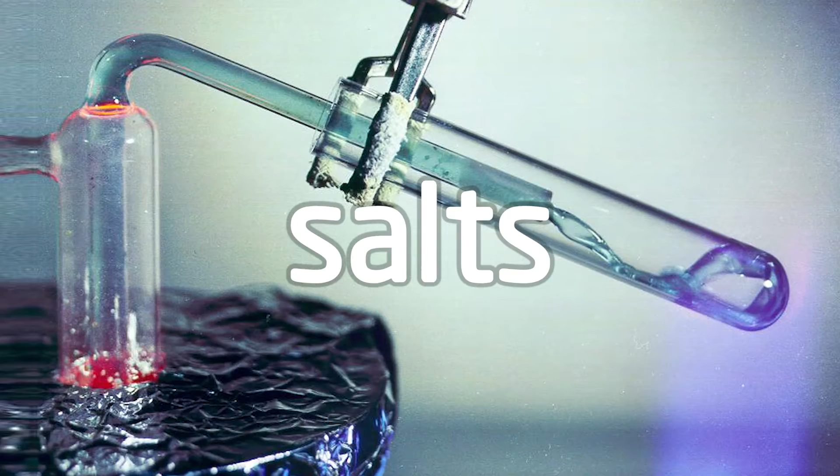You know, the Navy had reactors, and so the Air Force had to have reactors. Very, very radical nuclear reactors, totally different than the kind of stuff we have now, based on the idea that you could take salts and that they would be a really good medium in which to have a nuclear reaction.

Well, we were young chemical engineers at the time. God smiles on young chemical engineers. They do things that in later years would be regarded as crazy. It wasn't that I'd suddenly become converted to a belief in nuclear airplanes. That the purpose was unattainable, if not foolish, was not so important. A high-temperature reactor could be useful for other purposes, even if it never propelled an airplane.

This is an old facility. Look down before you walk. That's our biggest hazard here right now.

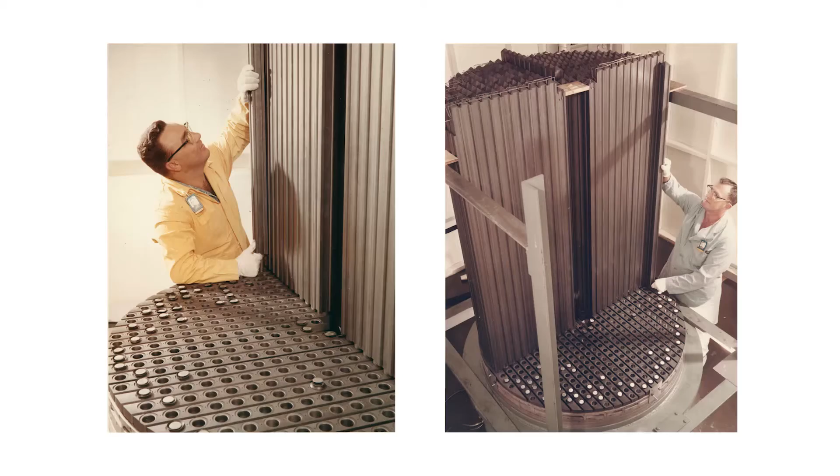Oh my goodness. Yes, yes. I've modeled this shape neutronically. It is like a lead pencil, isn't it? Yeah, it is. Basically. Graphite.

We just returned from a trip to Oak Ridge National Laboratories, and one of the exciting things that the Baroness and I got to do was to tour the molten salt reactor experiment, which was one of these types of reactors that was built in the 1960s. It was an experiment that demonstrated many of the key technologies, although there are some that still remain to be demonstrated.

How long have you been here? I've been here since 1992. There are very few people in mid-career in nuclear energy right now because there's a huge trough. We have a large number of students coming back into it. Well, the context has changed completely, hasn't it? It has. Yeah, when we went into nuclear energy, they said, 'What are you, nuts? There's no future in that.' And it really didn't matter. We say it's the true believers.

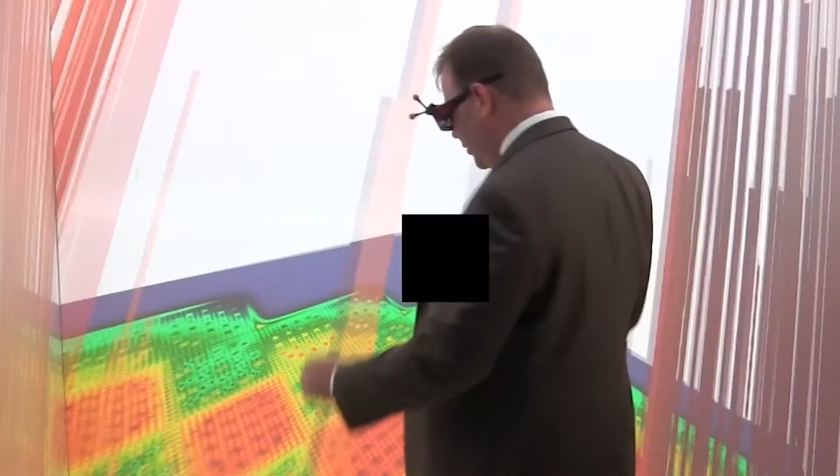So you could have a molten salt reactor that you could walk around on. Oh, this is so cool. You guys have got to try this. Oh, goodness, that makes you feel really weird. There's something in front of me here, it feels like.

I was in 7th grade. I read an Isaac Asimov story about the implications of what free energy would do. And I sort of knew I wanted something, I was going to be an engineer or scientist just from day one. And this sort of said, okay, what can you do to make a difference? And that was where I sort of said advanced nuclear power was something that could make a difference, and that low cost clean energy could make a huge difference to society. If I'm going to have to get up every day for 50 or 60 years working on something, well, it ought to be something I believe in.

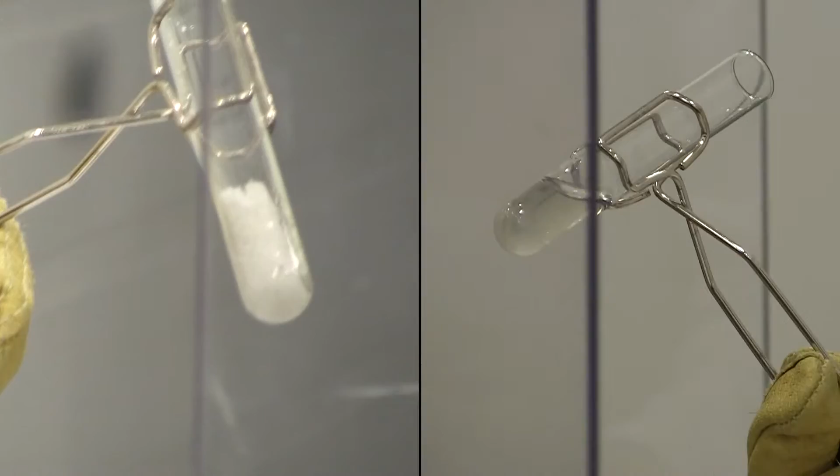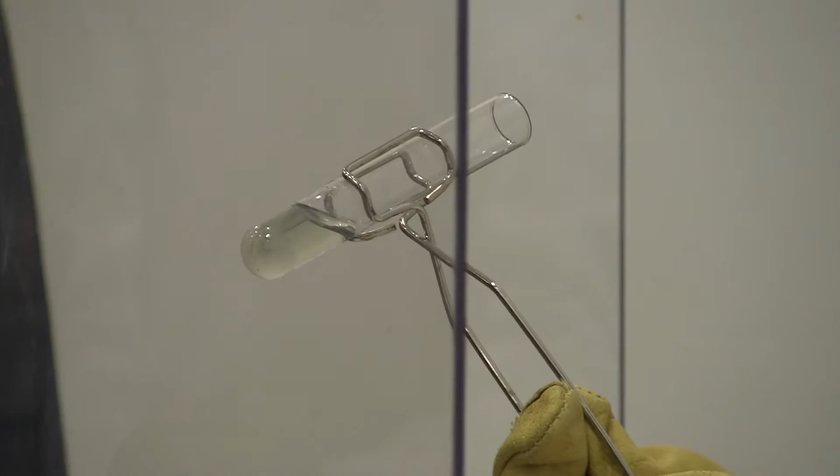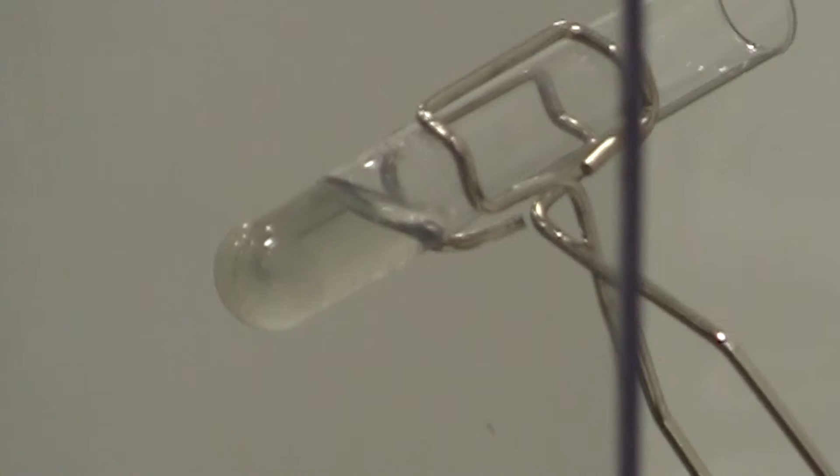Liquid salts are an outstanding heat transfer media, and it really doesn't matter what you're going to be transferring heat for, whether this be a solar power tower, whether this be a salt-cooled reactor or a molten salt reactor. Viscosity on it is 30 times larger, but water is very low viscosity, so it's still a very low viscosity fluid. Some people might imagine this is quite a gloopy or kind of slow-moving liquid, but it's actually quite fluid. You're right. It does go through a melt much like a glass as opposed to water, which doesn't quite do that. So we want to run it 100 C or so above this, so it does flow nicely.

If you go ahead and you repeat doing things in here, you can see you start to etch the glass just a little bit. So what we have to do in a reactor is keep things very highly reducing. If you put extra beryllium in there, essentially giving you a preferred spot to rust. And so this is all about controlling the potential corrosion of the salts within any vessel that you put it in.

Yep, the iron in some of the alloys is more soluble at higher temperatures, and so in your heat exchanger where it's at hot temperatures, you will get metals taken into solution, and then it gets to the colder end, it'll redeposit, and so you can self-plug your heat exchangers, which you would very much like not to do. And your technique to avoid that is keep everything very well reduced so it doesn't corrode in the first place. You'll make it lousy, but there are no strong chemical reactions that are going to take place between the salt and even direct contact with water.

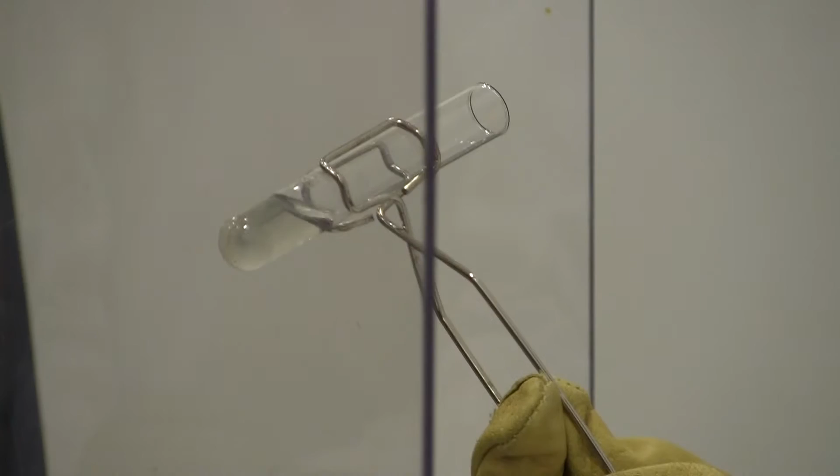The hazards on this are the same as hazards on a deep fat fryer, which is if I trip, throwing hot oil, or hot salt in this case, on visitors would be considered a bad thing. But there's nothing else to this, it just makes a nice little clear liquid.

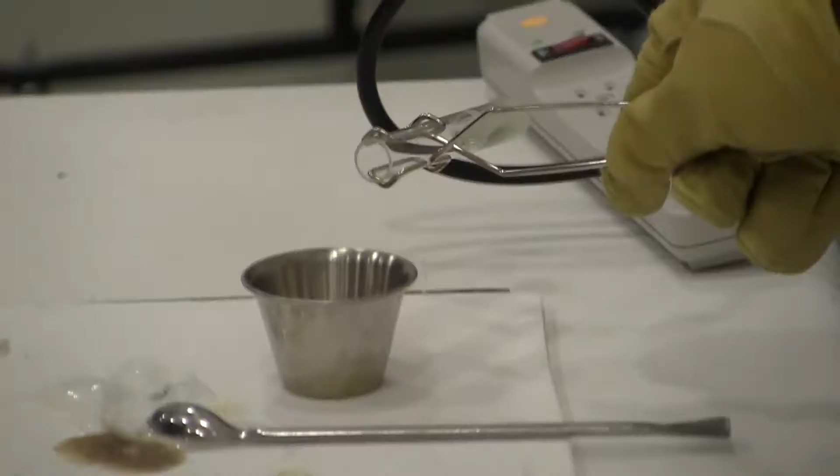I'll just pour this out into a little stainless steel crucible, and you could hear that little snap there, that was a little bit of moisture at the bottom of the stainless steel. At 450 degrees, this thing is a solid, so it doesn't take very long for it to form the solid again. Isn't that a nice feature? If you had a little crack on this and it was starting to weep, it forms a plug. Self-plugging. That's a nice thing, not being under pressure.

On the other hand, if your design keeps the vessel hot, it'll stay liquid, but that's why you have a guard vessel. If absolute worst case happens and you have a massive vessel rupture, you still catch it.

The Navy program that led to the light water reactors we have now was well optimized to the needs of the Navy. It actually wasn't very well optimized to the needs of power production. The reason we have that as the base for our power reactor technology today is because the Navy was prepared to pay the first mover costs to make one work. And once you've done that, it's extraordinarily difficult to compete with it, because those first mover costs are very, very high and have no financial return associated with them.

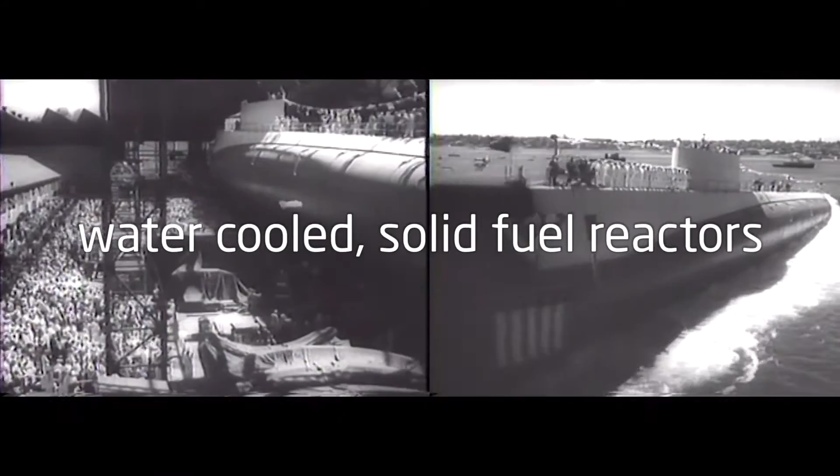The Navy built their nuclear submarines, and the Army took the same technology, the water-cooled reactor, and did their thing. But the Air Force wanted to build a nuclear-powered bomber. Weinberg was a practical man, and he said a nuclear-powered bomber is probably a really, really dumb idea. The dirty little secret was that most of the people involved in it knew from the get-go that it really wasn't practical.

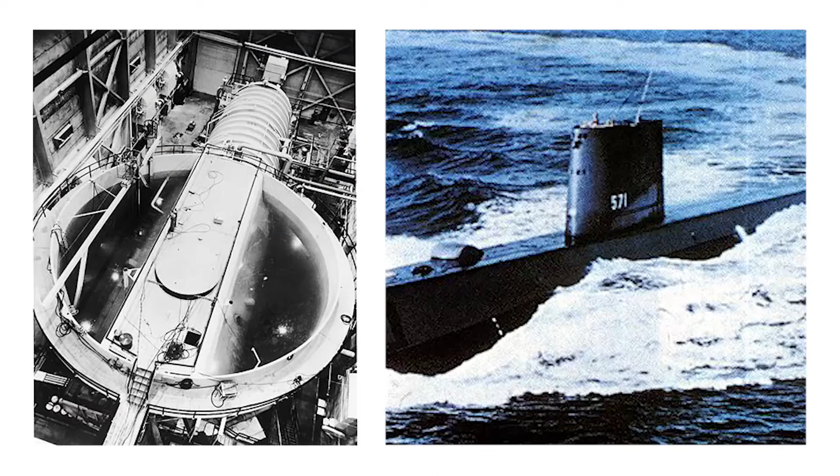In contrast to a submarine, where you've got limited space but you can shield it for the people on board, it's much harder on an airplane because of the weight. Most of us did not really think that the aircraft reactor really could work, but we did feel there was a very interesting technology there that someday could be applied. I would maintain that Weinberg was absolutely right in his assessment of the situation back then.

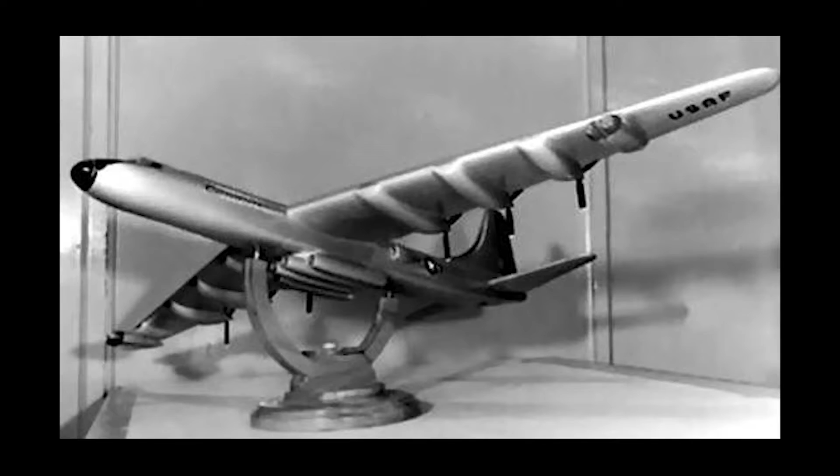He knew that to make the nuclear airplane work, they couldn't use water-cooled reactors, they couldn't use high-pressure reactors, they couldn't use complicated solid-fuel reactors. They had to have something that was so slick, so safe, so simple, that operated at low pressure and high temperatures, that had all the features you wanted in it. They didn't even know what it was.

I think someday this will be looked at as one of the great pivot points of history, that if this nuclear airplane program had not been established, the molten salt reactor would have never been invented, because it is simply too radical, too different, too completely out of the ballpark of everything else to be arrived at through an evolutionary development. It had to be forced into existence by requirements that were so difficult to achieve, and the nuclear airplane was that.

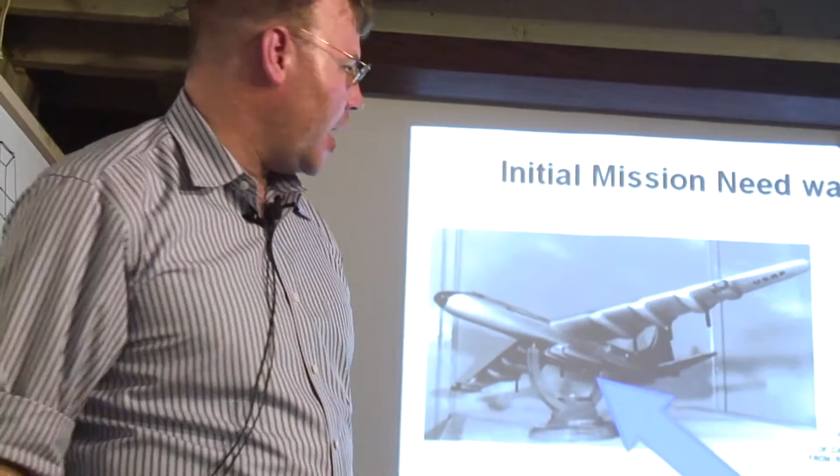So they began working on this high temperature reactor. Remember, this was invented before we had ICBMs or anything like this. This was a doomsday weapon. If you're flying this thing to Russia, it's the end of the world.

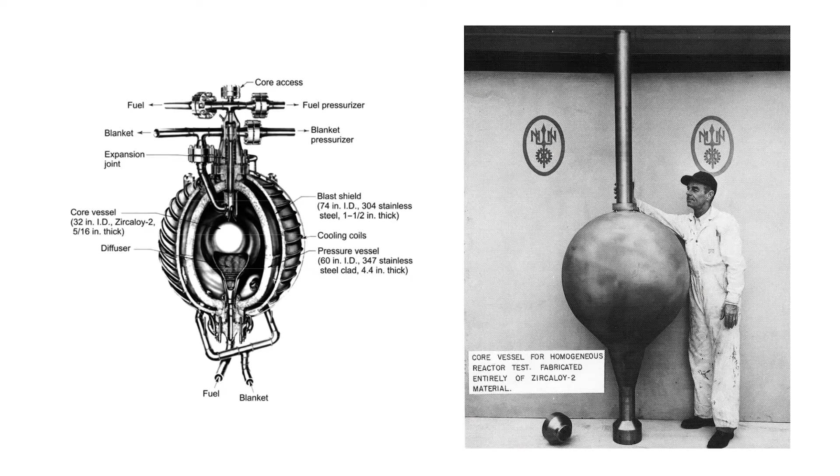I suppose you'd have to say it was a miracle that the homogeneous reactors operated at all, rather than that they operated well. Chemical stability of the system was not really sufficient, it was chemically unstable. The second reactor actually operated very well. That was the molten salt reactor experiment.

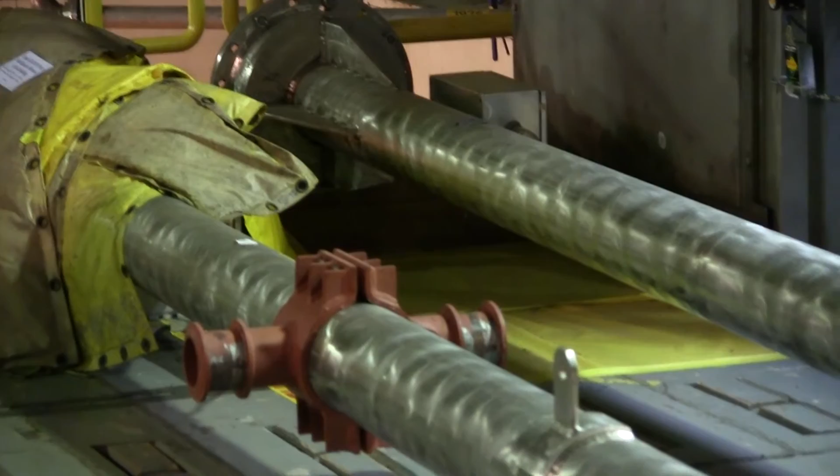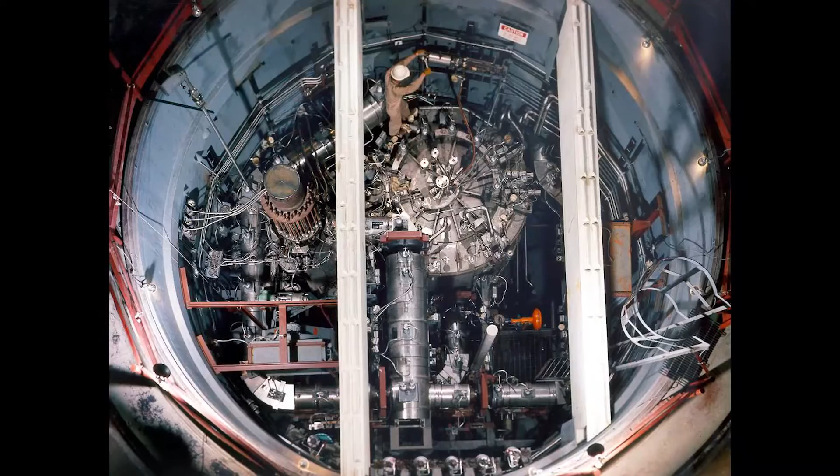So all those long-handled tools they had for operations, it was almost heroic actions when they were trying to do things. You've got this length of distance, and we'd certainly try to design things today that could be robotically handled. It just would not be designed the same way as it was at that point.

One of the things I've learned from talking to some of the old timers at Oak Ridge - these guys are in their 80s now, if they're even alive - people didn't disbelieve that we could build the machine. They didn't believe that we could maintain it.

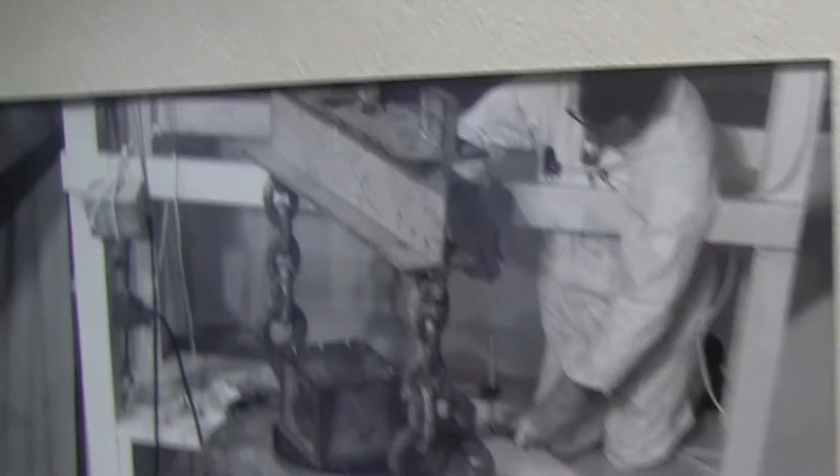Operation of the MSRE was not too difficult, and the people that I had working for me, they all had hound dogs under the porch, old cars out in the yard that didn't run very well. If anything came up with the molten salt reactor, they said, "We'll fix that." "How you gonna do it?" "I don't know, but we'll fix it."

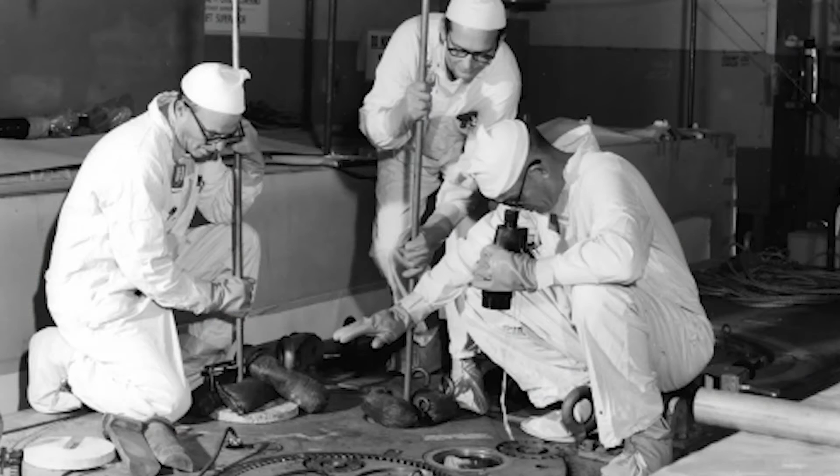And they did. One time, the sample capsule is down in the pump. The flexible steel cable got tangled up. We got bad news - here's the end of that cable cut off. So I said, what are we going to do? And there's the good old boys for you - they said, isn't there such a thing as fiber optics? There's the capsule. And they fished that capsule out. We were back in business.

And they had a lot of long-handled tools, remote cameras. It was challenging, but he felt like, despite the challenge of operating high radiation fields, that they were able to operate and maintain that machine over the course of its lifetime.

We worked for several years on an experiment that proved that you can handle this molten salt reliably, and when things go wrong, we were able to fix it. The advantages outweigh the difficulties, and the concept is ultimately going to be a practical application.

We still have a few folks, even operators, who are around here. Syd Ball's office is just literally three over from me. He was at the controls when it reached its highest power. He told me that was an accident.

It sure was. Yeah, there's another way to tell that story too. I was running some tests late at night. The device that I was using got stuck in the wrong place and pulled the rod out, and the power went up and up beyond the design power, and then it controlled itself and went back down.

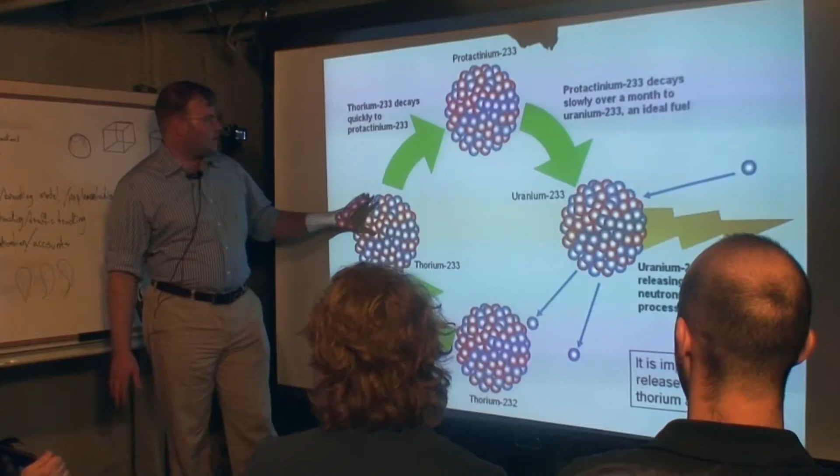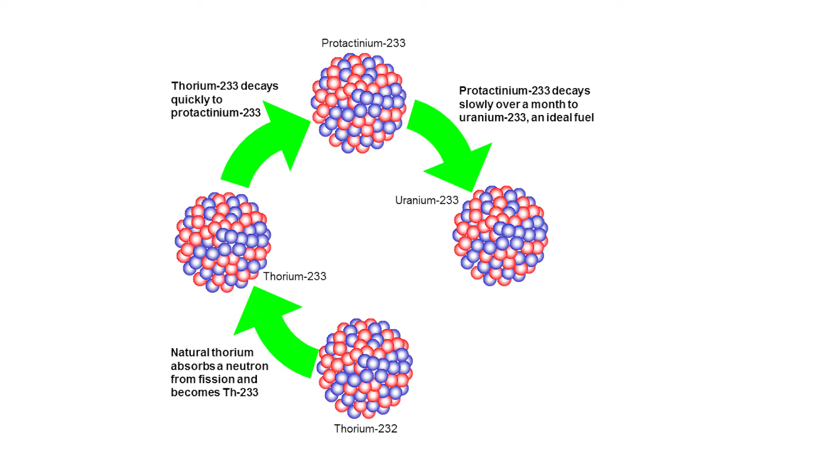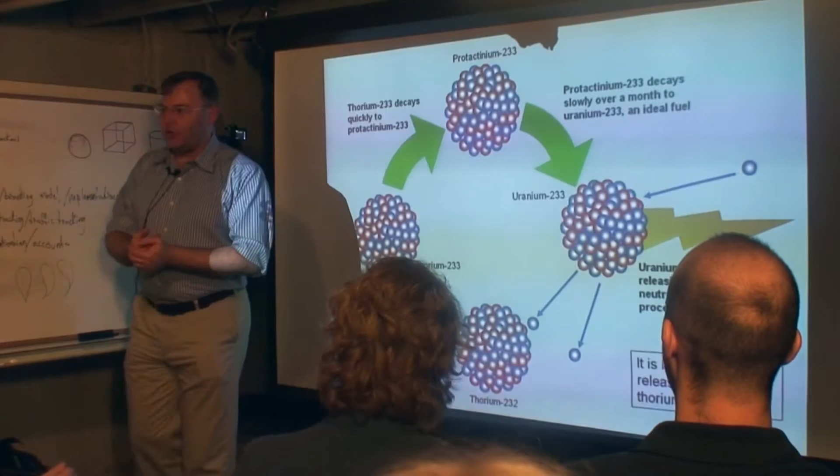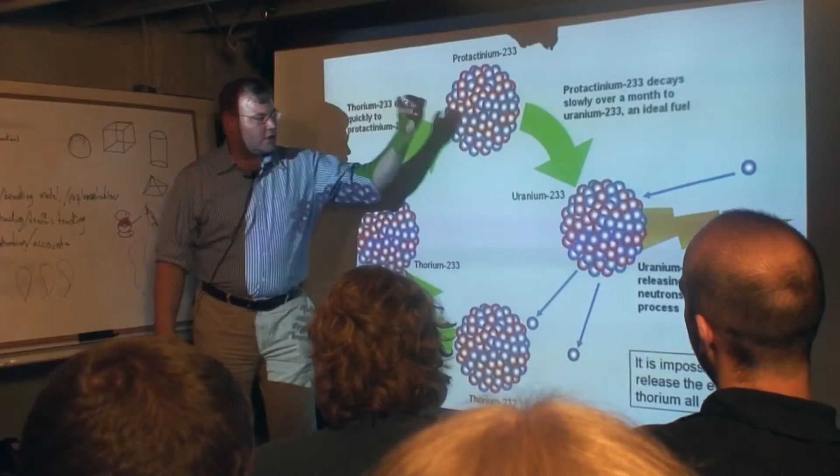The basic idea is thorium all by itself is not going to release nuclear energy. But if you hit thorium with a neutron, the thorium will absorb the neutron and turn from thorium-232 into thorium-233. It will decay into protactinium-233, and then it will decay over about a month to uranium-233. Uranium-233, if you hit it with a neutron, it will fission. In addition to releasing all that energy, it will release 2 or 3 additional neutrons. You need one of those neutrons to go find another thorium, and you need another one to find another uranium-233 to continue the reaction. You're fissioning uranium-233, but you're making a new one. You can almost think about it as a pseudo-catalyst. If you had some uranium-233, you could catalyze the burning of thorium indefinitely.

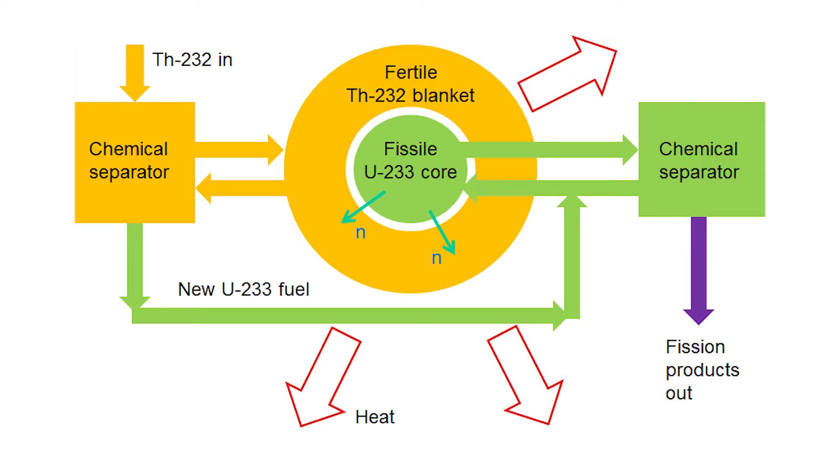So through this process, you can essentially implement that very simple thorium cycle, and this is what Weinberg and his team were working on in the 1960s. The molten salt reactor experiment was the core. After they completed the molten salt reactor experiment, they went to the Atomic Energy Commission and said, hey, can we have some more money? We'd like to go now and build the real thing. We'd like to build the blanket, and hook up a power conversion system to make electricity. They felt like they'd shot the moon.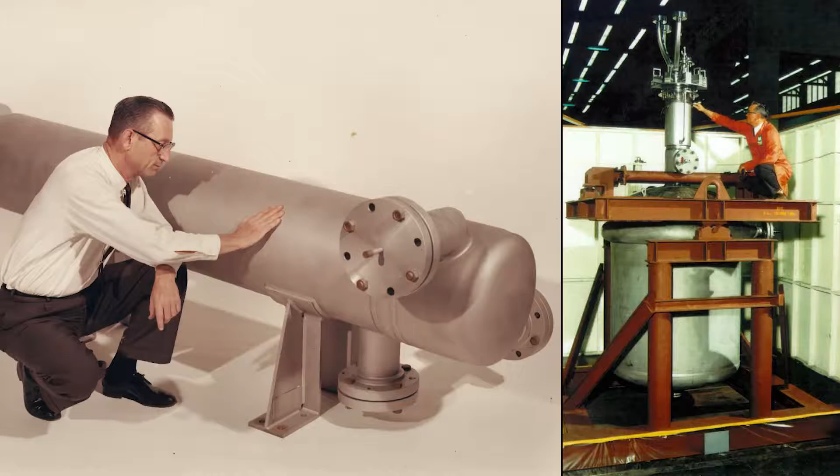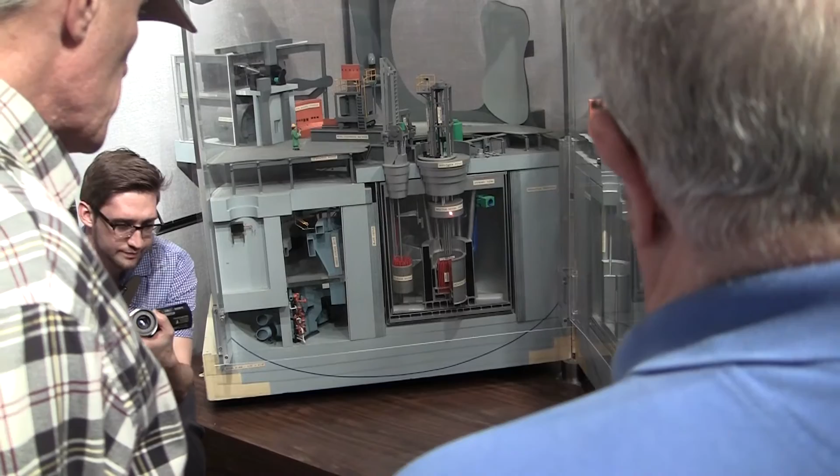Well, the Atomic Energy Commission, unfortunately, did not share their zeal to continue with the technology. Milton Shaw, who was the head of reactor development in Washington, called up Alvin Weinberg and said, stop that MSRE reactor experiment, fire everybody, just tell them to clear out their desks and go home, and send me the money for fast breeders. Milton Shaw was sold on the sodium-cooled fast breeder reactors, and I am not familiar with why that was.

Do you see a prevailing opinion here about molten salt reactors? We haven't been funded to look at molten salt reactors. There's no opinions about basic -- the opinion is simple: build IFR. That's it, okay, that's the opinion. The problem with the MSRs is that they've never done it. They had one at Oak Ridge for a little while. They went through and did a couple of little tests. We realized that we were minor league money-wise compared to the other programs.

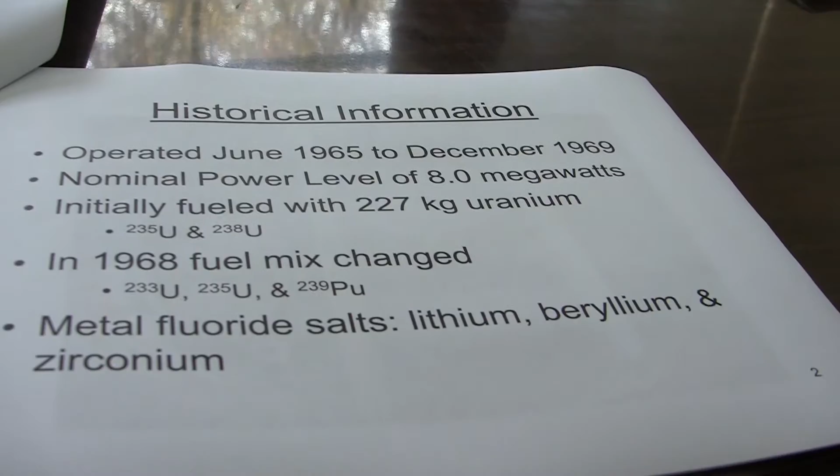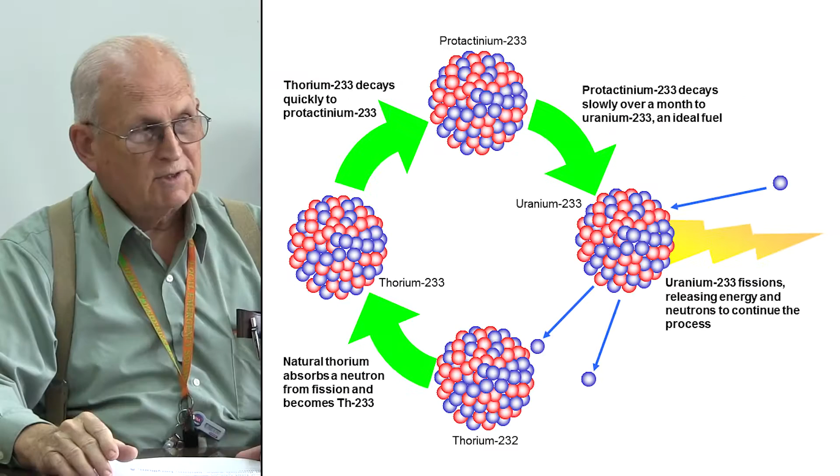U-233 was tested here, and there was a little bit of U-235 in it, and they added some plutonium-239 into that fuel mix. Do you know how much plutonium was added? Oh, about 600-700 grams. They thought the U-233 was the utopia of uranium fuel.

Do you feel like the program had a sound technical basis, or do you feel like technical problems were the basis for cancellation? Some of the technical reasoning I heard for the cancellation was that there was a corrosion problem. Tritium was raised as another issue. We made no effort on MSRE to do anything with tritium, and there was a perception that managing tritium was going to be very difficult, if not insurmountable.

Did the people on the program, particularly the chemists or material scientists, feel that corrosion was an insurmountable problem? No, and in subsequent work after that initial shutdown, they did some experimental work that seemed to bode very favorably for an ability to solve that issue. As well as the tritium issue, because we did do some tritium experiments in that 1974 to 76 period, and those are documented.

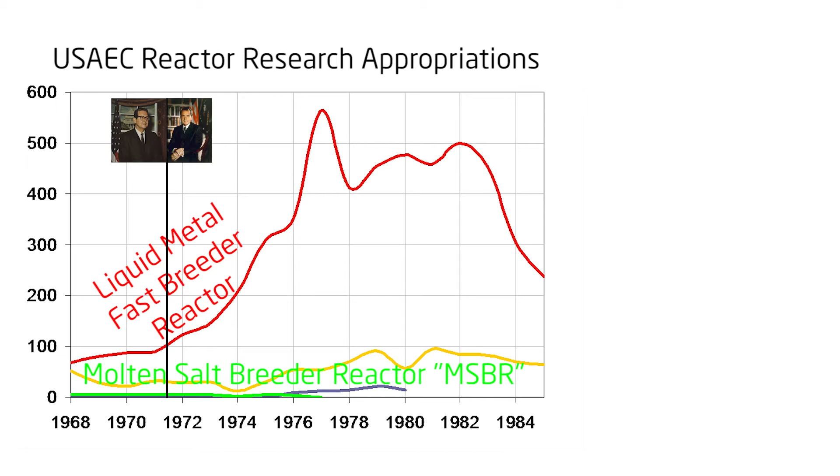But I am being ruthless on one thing. Any activities that we possibly can should be placed in Southern California. So on the committee, every time you have a chance, needle them, say, where's this going to be? Let's push the California thing.

You do that? Nixon was from California, Hosmer was from Southern California. Chet Holifield, who ran the Joint Committee on Atomic Energy, was also from California. It doesn't lead me to believe that the president was seriously considering alternatives to the fast breeder reactor and other paths that could be taken. It was a focus on what can we do right now to get jobs.

The United States is going to go forward in building a breeder reactor. Now, don't ask me what a breeder reactor is. All of this business about breeder reactors and nuclear energy and the stuff is over my head. That was one of my poorest subjects, science, and I got through it, but I had to work too hard. I gave it up when I was about a sophomore.

Nixon, by his own admission, was not particularly well versed in the different types of breeder reactors. Unless you're one of those PhDs, you won't understand it either.

But what I do know is this, that here we have the potentiality of a whole new breakthrough in the development of power for peace.

Maybe it might have benefited our country a little more if Nixon had been able to ascertain the different values of different types of breeder reactors and why one might have an advantage over another. Representative Craig Hosmer, who was the fellow on the phone call we heard earlier, said that if cost targets were missed, 'I, for one, don't intend to scream and holler about it.' So it's not hard to see that they could see great economic benefits accruing to their area of the country.

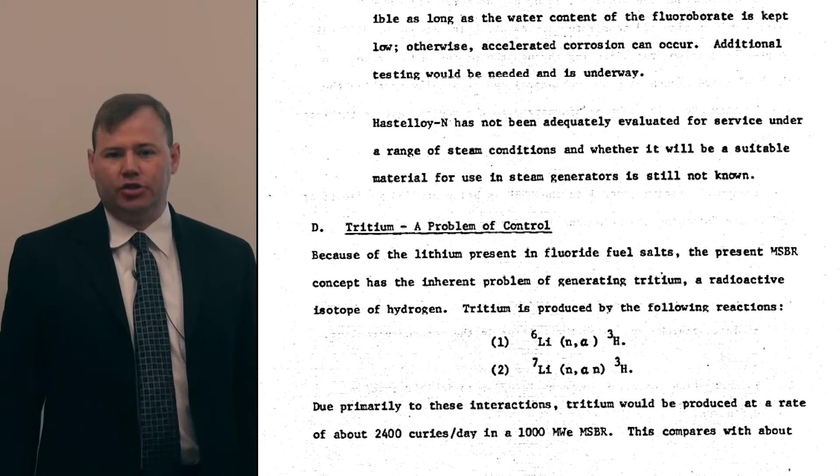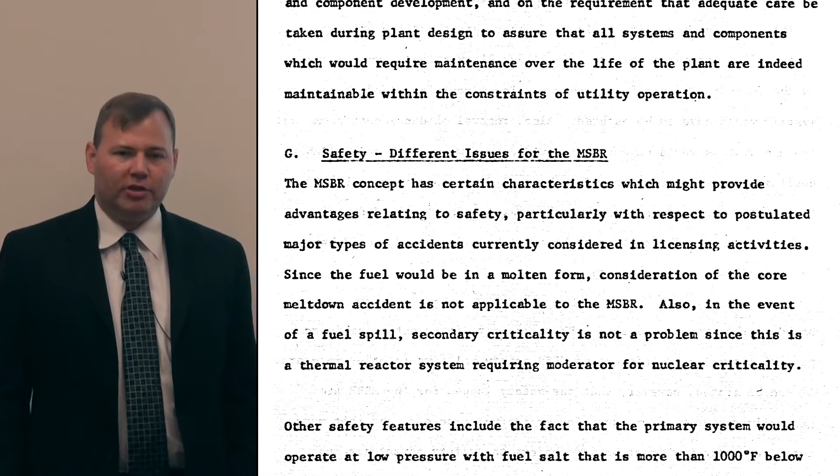That same month, the Atomic Energy Commission issued WASH 1222, an evaluation of Weinberg's molten salt reactor. It was highly critical of several technological issues encountered during the development of that idea. More importantly, it almost completely ignored the safety and economic improvements possible through the use of molten salt reactor technology. This was the main focus of Oak Ridge for decades, and it was very abruptly cut off, a very bitter pill to swallow for them. A lot of these great minds thought their life's work had kind of gone to waste.

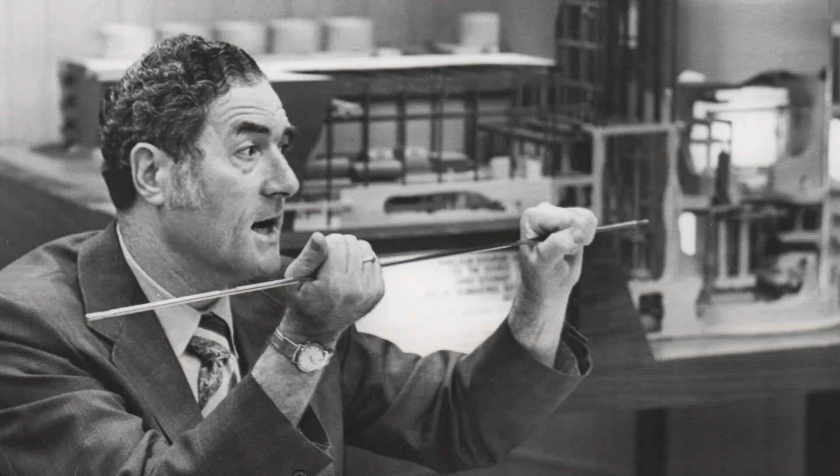The original shutdown came early in 1972 with a letter from Mr. Shaw that says, 'Thou shalt stop right now.' One anecdote I heard: he said, put your hand on your desk, take everything that has to do with molten salt, sweep it off, and you're finished. I saved all my documents. I did too.

So you had this geographically isolated place with a huge body of concentrated molten salt knowledge that never got out. We had a corpus of people in Oak Ridge who knew how to do this in the mid-1970s. They're literally dead and gone now. People that worked on the molten salt reactor would come back and then get shut back down, over and over. A lot of people got burned out from that pattern. I've met a handful of them - they're in their 80s. They're not going to do this anymore.

What's happened to Paul Haubenreich and Beecher Briggs and those guys? Have you kept track of them, do you know? Well, Beecher's been dead for a long time. How about Paul? Paul, I have not had any contact with him, so I don't know. Quite a few of them are dead now. Well, that's true too, yeah.

You don't get taught this stuff in nuclear engineering school. I said one time in an online talk, you could get a PhD in nuclear engineering and never learn about this stuff. I got an email a few weeks ago from this guy - it was really funny. He said, Kirk, I just saw your talk, I want you to know I just graduated from Purdue with my PhD in nuclear engineering, and I want to tell you, you're absolutely right - I have never heard of this stuff before. He goes, I want to tell you it's even worse than that, because I'm totally a student of nuclear history and I've never heard of this. How did I not hear this? He goes, it's great though, you're absolutely right, this is top-notch stuff they did and we should be working on it right now. But it's absolutely possible for you to go through a normal curriculum and never learn about this.

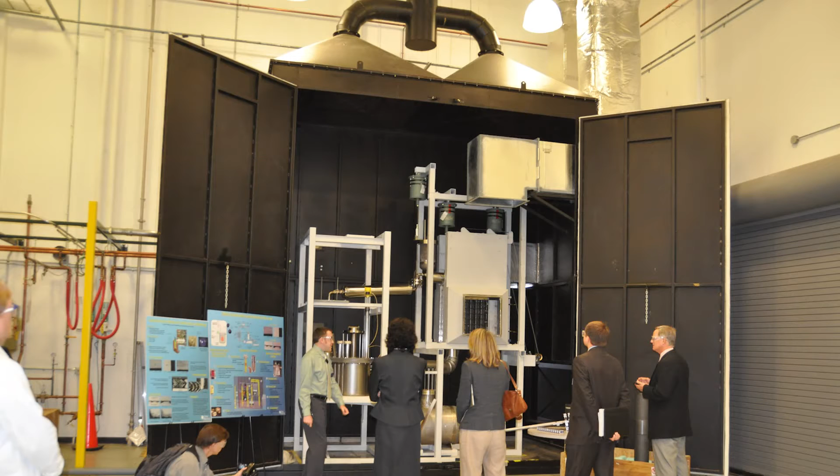We are trying to demonstrate some of the core technologies you have to make liquid salts a standard heat transfer material. The idea of this loop is to retain our expertise in using high temperature salts, to provide a platform for us to test different components, different reactor concepts. Above about 600 C, it becomes technologically very difficult to transfer heat effectively. The loop is designed to run at 700 Celsius, about 1300 degrees Fahrenheit, and the whole loop is made out of Inconel 600.

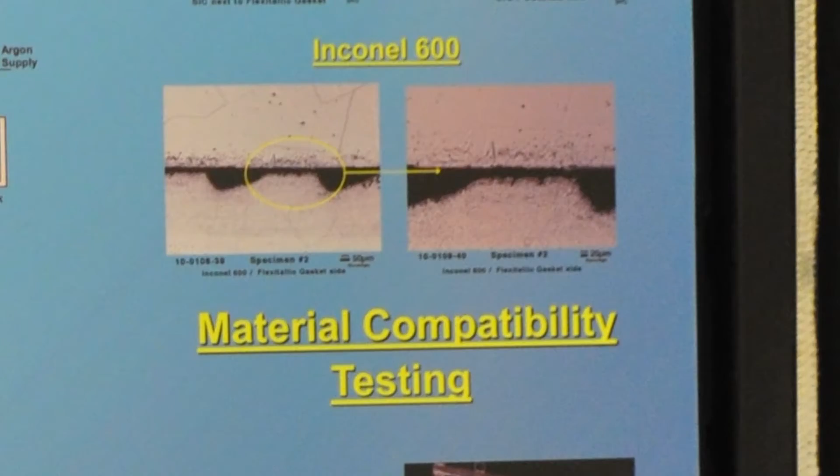Ideally for salts, you'd use an alloy like Hastelloy N. Right now you can't really get the right components, the right shapes using Hastelloy N, so we use Inconel 600. It's maybe not the best option, but it's the economical and available option.

This one does flow, so as the salt flows through it, it sends a sound wave through, and that measures the Doppler shift. So these are fluidic diodes.

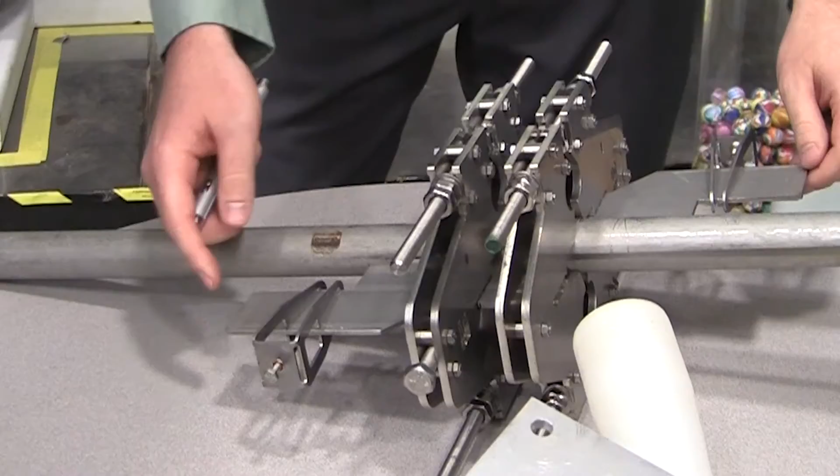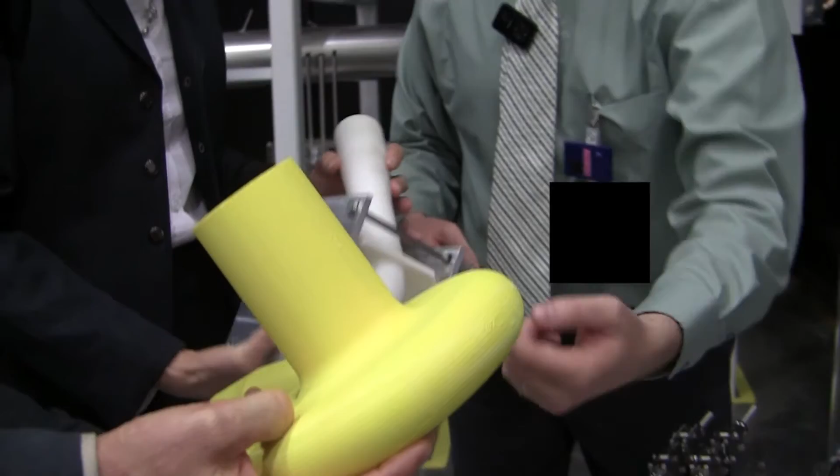It's a way to control liquid flow without using a valve. In normal operation, it comes in this side and out this side, and that creates a lot of resistance—it spins around and comes out. During an accident, the flow reverses and goes this way, and there's not a lot of resistance, it just flows out here, because it doesn't spin around.

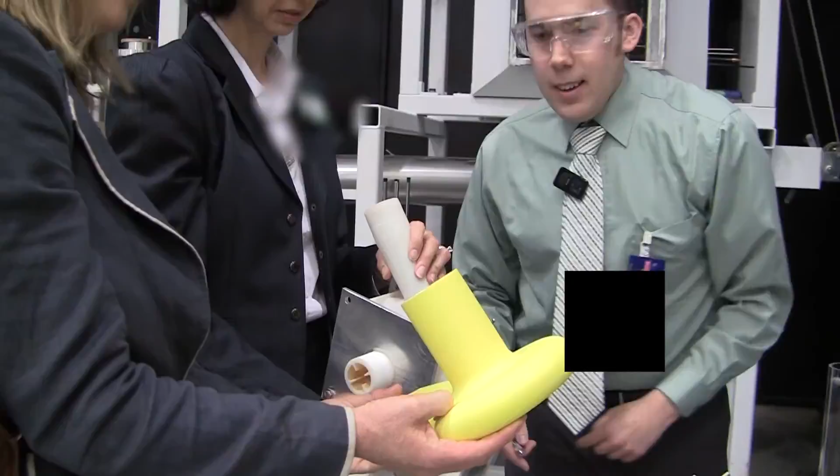Then there's a heat exchanger, that's another part of the test. Is all the heat localized on the pipes, or do you heat the whole box? Yeah, all the heating is in the pipes, well, either in the pipes or on the outside of the pipes. It's trace heated—you can see coils of heating tape. All the pipes will be insulated with about 4 inches of insulation.

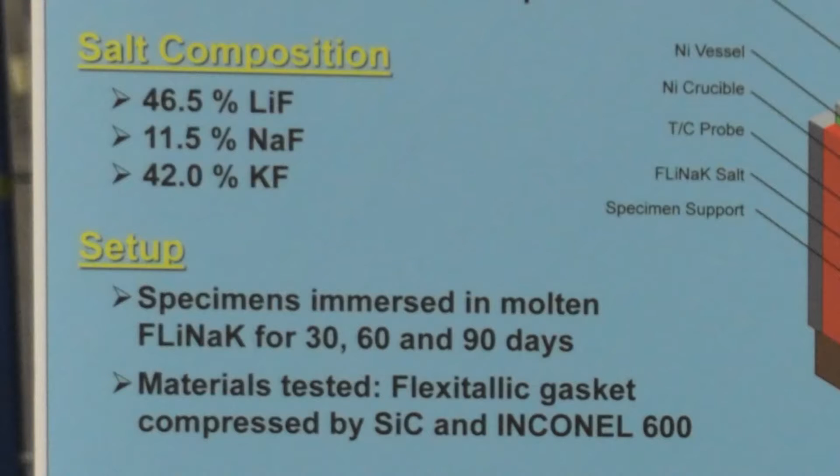There will be a crucible here. That's where we'll initially load the salt, pass hydrogen fluoride and hydrogen through it, and that will clean out the oxides and different contaminants inside the salt. Once the salt's clean, we'll pump it into the storage tank.

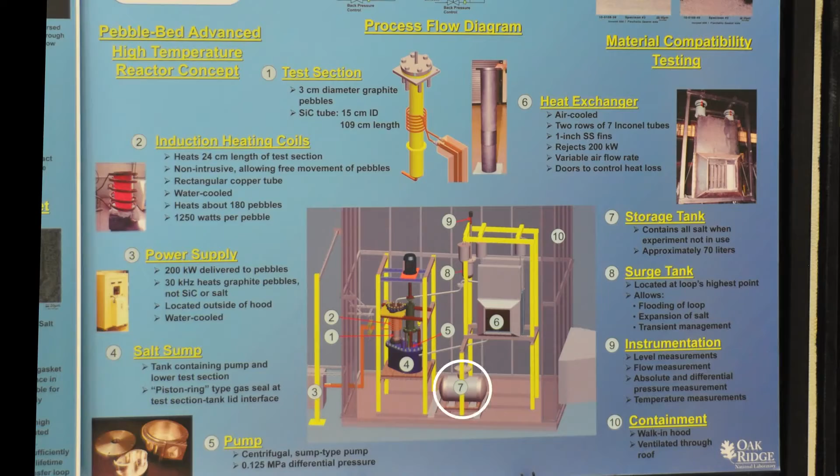The salt is not allowed to freeze inside of it. That's an issue with salts, where you can't have it just freezing inside of pipes—it expands and breaks.

The idea is we're testing a reactor concept where the fuel would be inside these pebbles, and we'll fill it up about this much—600 spheres will be inside of it. That's where the fission and the heat is created, and you've got flowing FLiBe over it.

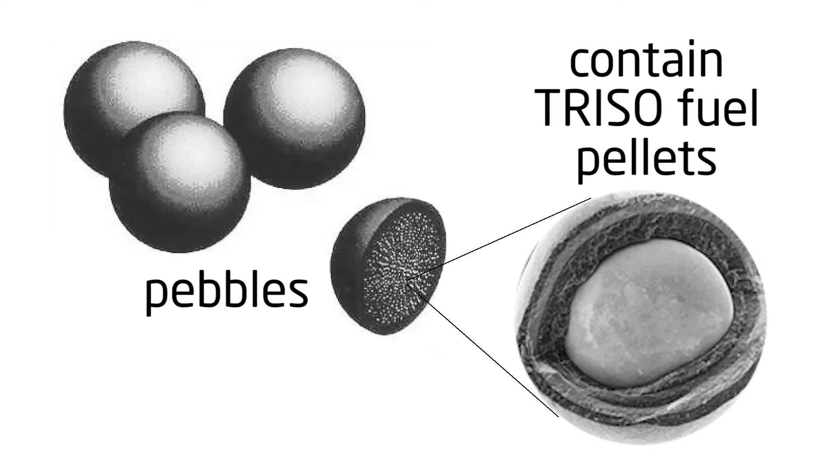Can I ask what the theory was around using a solid fuel pebble in the FLiBe rather than dissolving the actinide into the salts?

Currently in this country, we're not really looking at molten salt fueled systems. Using a molten salt as a so-called working fluid, it's doing the job of transferring heat from one place to another. Molten salts have what's called heat capacity—the ability to hold on to heat. They're great at it. In the example of your car, you want to move heat away from your engine as efficiently as possible and then just disperse that heat.

The boiling point of water is only 100 Celsius, 212 Fahrenheit. Don't ever open your radiator. Why? Because it's under enormous pressure.

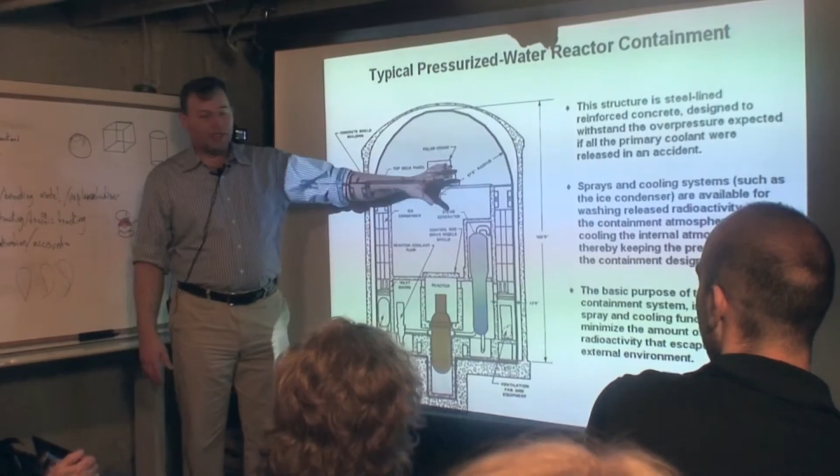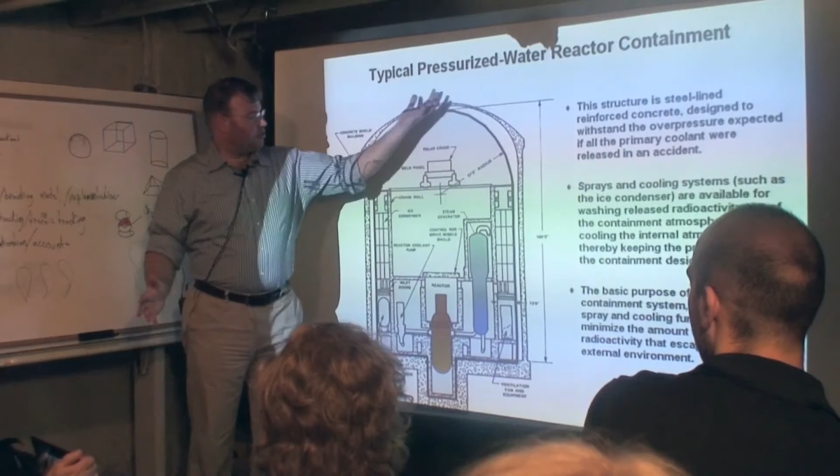This building is the size it is, and it's the way it is, precisely to accommodate this event. They've designed this reactor so if this happens, all the steam is captured in this building and doesn't get out. It's much, much, much bigger than the reactor, and that's all driven by that 1,000 to 1 difference in density between steam and liquid water.

The boiling point of a molten salt, however, could be 1,000 Fahrenheit, could be 1,500 Fahrenheit, depending on the type of molten salt. They do it at 1 atmosphere of pressure.

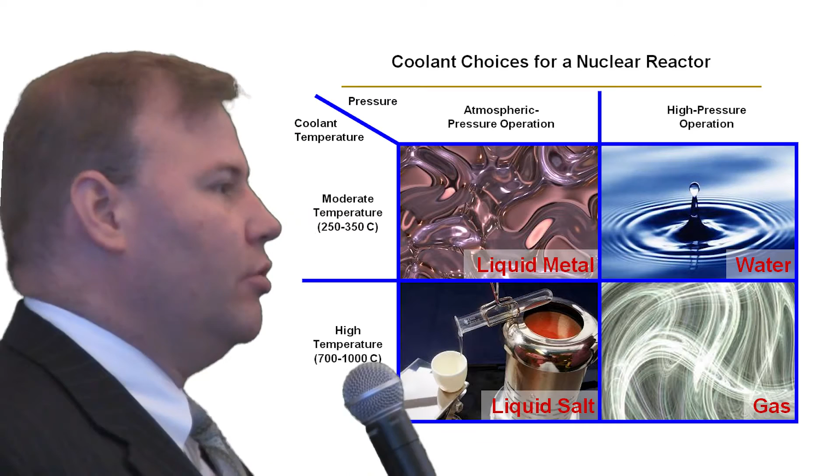Visiting the potential coolants, water is the one most commonly used. It operates at relatively low temperatures and very high pressures. That's exactly what we don't want. We want to operate at low pressures and high temperatures in order to achieve high thermal efficiency. Gas can operate at high temperatures, but it has to go to high pressure. Only the salts appear to offer the potential to go to high temperatures at low pressures, and that's a unique combination.

Using a molten salt as a working fluid to move heat around is excellent, because in this case you want as much of that heat as possible. Now, fluoride salts can also contain nuclear fuels like thorium and uranium, and that eliminates a major cost of what we do today in nuclear, which is to fabricate nuclear fuels.

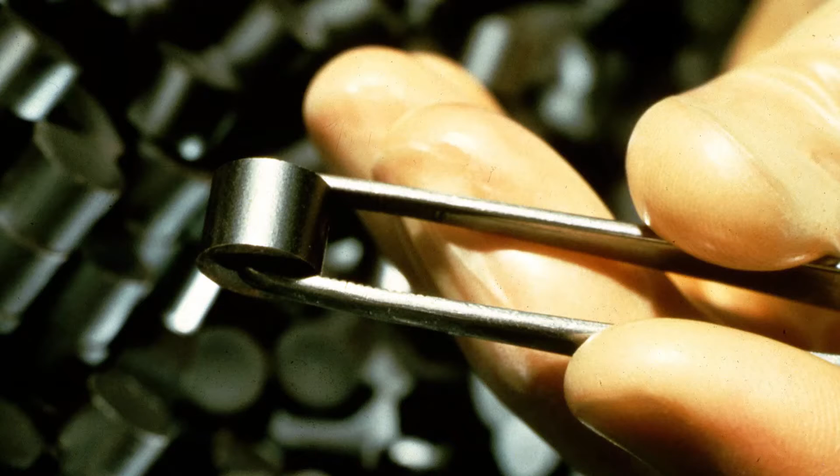Okay, let me talk about today's nuclear fuel. They take these fuel pellets and slide them down these zirconium tubes, segregating the pellets along the length of the fuel assembly according to enrichment. They'll put the most enriched ones in the middle, and then decrease the enrichment along the length of the fuel assemblies. It's a ceramic.

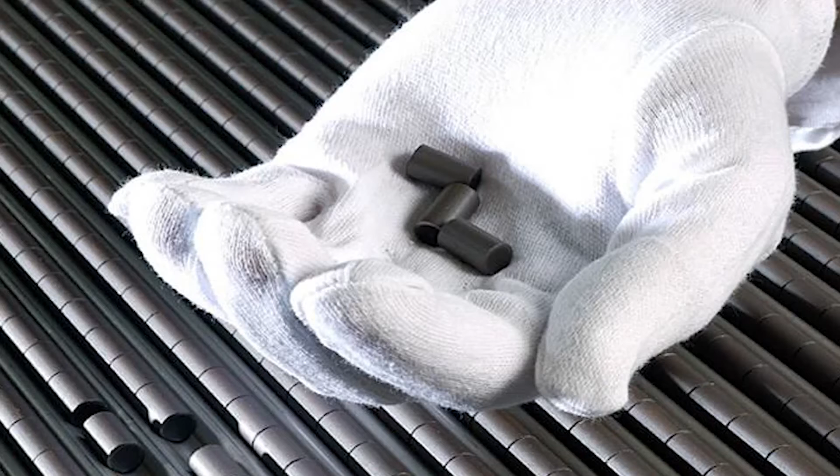It's a lot like the stuff your coffee cups or your cooking ware is made out of. Great at going to high temperature, but not thermally conductive, so it gets very hot along the center line of the fuel. This stuff has about the cross-section of a pencil, but between the center and the edge will be like 1,000 degrees of temperature difference. That puts enormous thermal stress on the material itself.

You can't even come close to 100% burn. Not even approaching it. If it gets too damaged, it's going to breach the cladding and let some of its fission products out. So you get very, very poor fuel utilization.

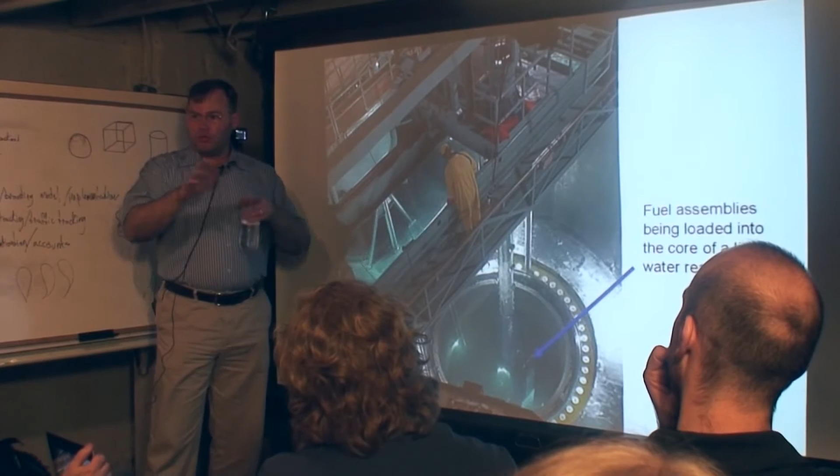If you remember when you went camping and you built a fire, it burns hottest in the middle, and the stuff on the edge isn't getting burned very good. They'll load in about a third new fresh fuel, and then they'll reshuffle the fuel that's already been in there, moving it from the center out to the periphery.

All their money now is coming off fuel supply contracts. That's how GE and Westinghouse make money on nuclear power today. They don't build reactors, they sell fuel. Then along comes someone saying, hey, guess what? I got a reactor, it's got no fuel fabrication to it.

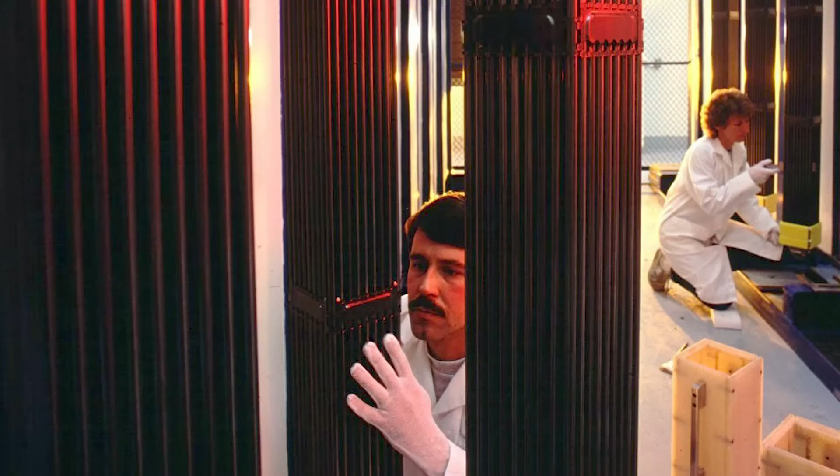Making a fluoride salt, by and large, is trivial. Making a carefully enriched solid oxide is not. It is not. So you could get an aqueous fuel.

In this system, you wouldn't put fuel in it. There must be some advantages to doing the solid fuel. If you want to use the salt as a coolant, it's just much easier to do something that's non-radioactive here. That's why we have the walk before you fly approach.

The U.S. is electing to go after a salt-cooled reactor at first. Our method of rejecting heat is into the coolant.

What we have are planks, about 25 millimeters thick. You can put whatever kind of test you can imagine in this area. We could put a solid plated fuel in. That test section can be replaced and others can be put in.

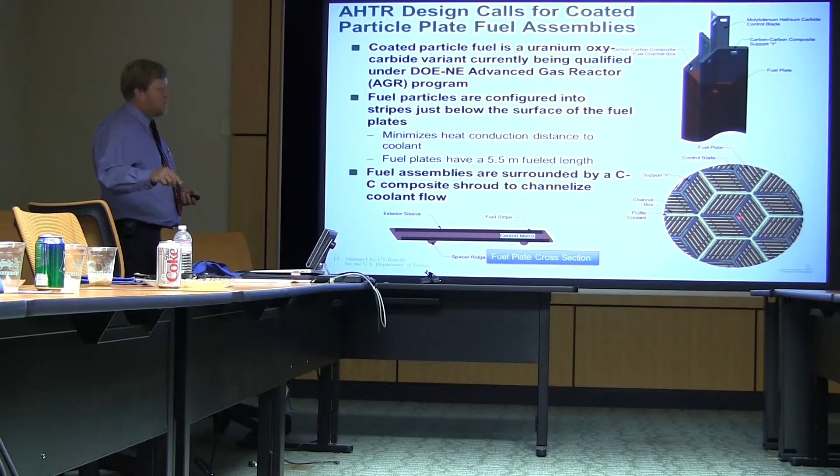If you're looking down from the top, there are 18 fuel plates arranged in a hexagonal grid. In a solid system, you can't get into the bulk of the solid fuel. In a liquid system, you effectively have infinite surface area.

It is not to say that the U.S. doesn't recognize that molten salt reactors have some very interesting, advantageous capabilities, but they are a more technically challenging thing to do. What is easier? Running a liquid past a solid in order to transfer the heat, or having the fuel be a liquid and use that in and of itself?

So I would argue that actually combining the two is easier. Sure, it's more chemistry, but so what? I'm a chemist. There are lots and lots of chemists on the planet, and a lot of them are a hell of a lot smarter than I am. So, go solve the problem.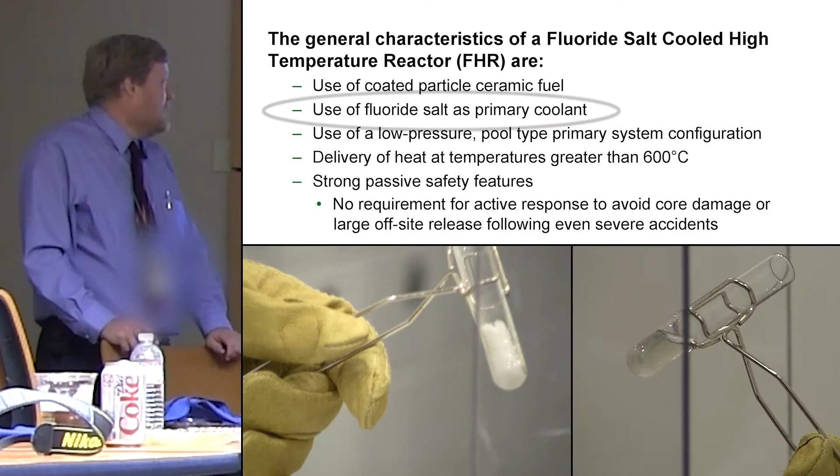It uses a fluoride salt as a primary coolant. It uses coated particle ceramic fuel, the TRISO fuel. This is the TRISO. Essentially, these are small kernels, smaller than a millimeter.

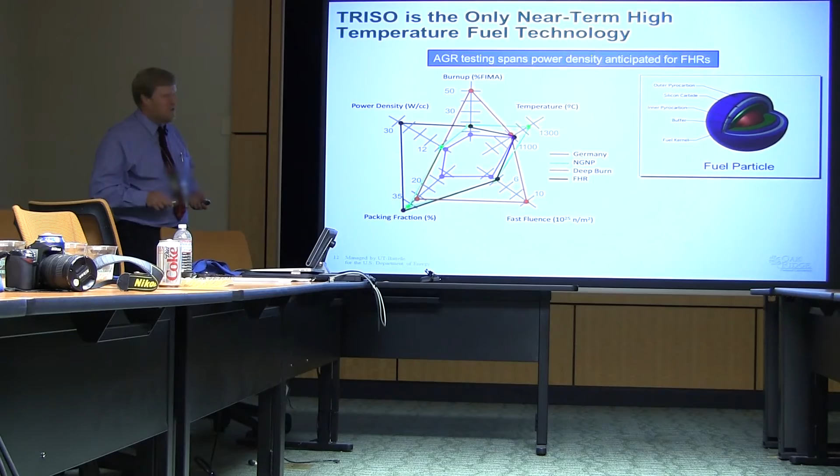We've got the fuel in the middle, and you've got a multi-layer structure. The important thing is the silicon carbide in here, which is actually a gas-tight containment. Silicon carbide, even though we're using that as part of the design, that's part of the test. We're going to find out how that performs in a salt environment now.

We'll be doing natural circulation, safety testing, corrosion specimens in here in a pumped loop. I figure the next decade we will continue to use this as a base for our system.

And you just happen to hit the timing such that the induction power supply is out being serviced, and the pump is out being serviced here. We're expecting by the end of September to have the loop pretty well ready to heat up.

They're not doing neutronic stand-ins the way China is. So what's the freaking holdup? They got the last guy in the world who knows how to make these different kinds of salts. We're not asking for our national lab to do miracles. We're asking them to basically replicate something they did, probably in 1952.

Things went very fast in the 40s and 50s, not only because of the regulatory environment, but also because they were not developing commercial nuclear power.

They're developing it—just get a reactor up, show that it works, do experiments. But nuclear technology is well beyond that now. It's commercial production technology, so you have to do things differently than back then. If you wanted to just do an experiment, yes, we could compress the scale and have something running in a very short period of time, but that's not what we're looking for now. We're looking to be a preferred source of energy for the nation, and that takes more time.

Back when they were developing the molten salt reactor, they had numerous loops that were not fueled. These range from natural circulation test loops, to material testing, to pump systems like this. Most of the technologies for a molten salt reactor, as far as thermal hydraulics, are identical. So they're all very relevant.

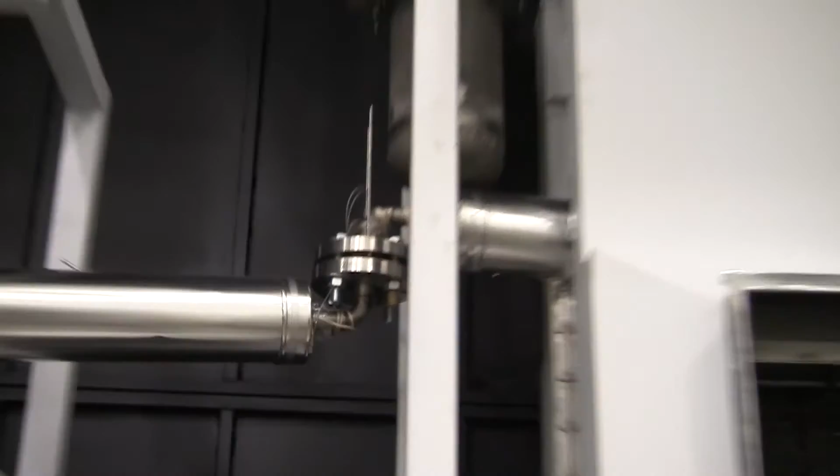There are a number of technologies that have never been done before in salt—that rotating flange up there with gasketed seals, the fact that we've got ceramic and metal pieces in a single loop. Tons of what you're doing with FHR is in common with what we're doing.

I can certainly see reasons for looking at thorium reactors as a follow-on to the true molten salt reactor. You have your conventional solid fuel with a liquid coolant—a fixed fuel form with liquid flowing by it. Your pebble bed is a bit of a transition, in that the pebbles can percolate up through, so you get some movement of the fuel. Then your next step is a slurry, where you've got smaller particulate moving with the flow. The final step is the fuel actually in solution. You can almost imagine a continuum, with the pebbles getting smaller until finally they're in solution—each of these are steps towards a full solution.

Different reactor concepts—that's something we're actually debating internally within the nuclear lab system. Do we want to build a prototype reactor that demonstrates some game-changing technology for nuclear? Yes, you do. But it's going to be a major national commitment when you're talking those types of numbers, and there's nowhere near that level of consensus that this is the right path forward. Without building that consensus, we're going to stay an interesting technology option forever. We will never go beyond that.

We're funded through literally thousands of projects that come down from DOE and other government agencies, where they say we need you to go do this, we need you to go do that. There's no line in the federal budget that says Oak Ridge National Lab, $1.65 billion, go do good things. So we need something now to add to our grid with clean nuclear power that's going to get us to these advanced designs, and that relies heavily on the established technology that was the light water reactor.

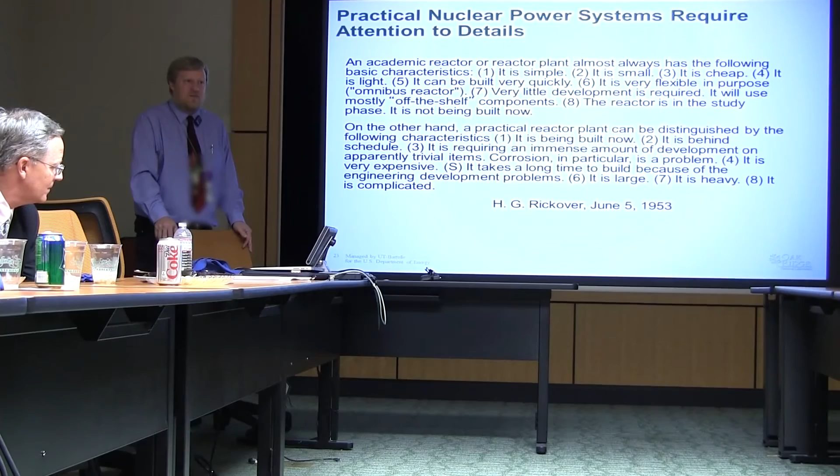Now, there are other parts of it that are resource limited, and you could go at those more aggressively. We do the best we can with the resources available. But there are people up there who control the resources—they're not going to make it happen, but they can at least ease the path. It is about shifting people's thinking to think a little more long term. Right now, there's a lot of focus on assuring the LWR industry gets, as we talk about, life extension.

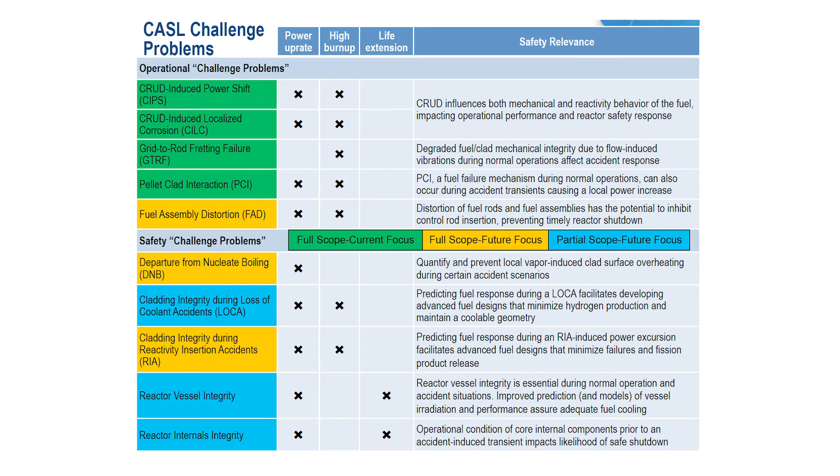Consortium for the Advanced Simulation of Light Water Reactors, CASL—it's an effort to develop high-fidelity integrated models of operating reactors. We're focusing on pressurized water reactors, and new fuels that are more tolerant and resistant to accident scenarios like loss of coolant and cladding integrity.

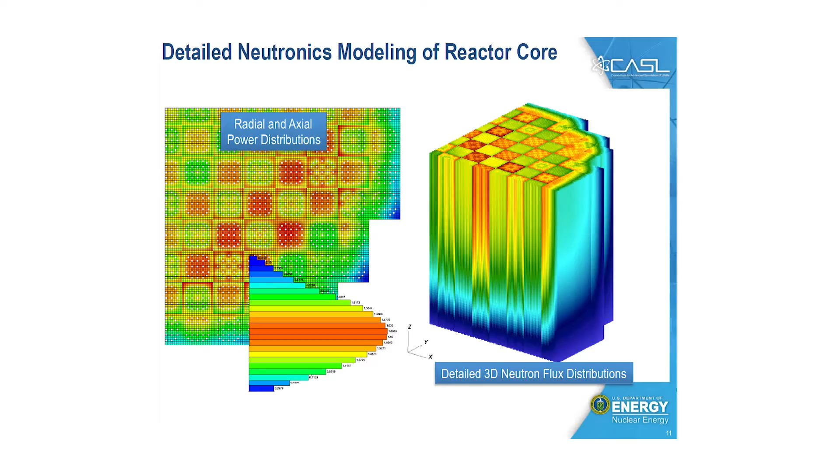Right, so you're modeling a physical system. So how do you know this is right? These white areas are control rod guide tubes. In the center of one of these is called an instrument tube, and they can run a fission detector down that instrument tube and get an axial power distribution. So we can compare that.

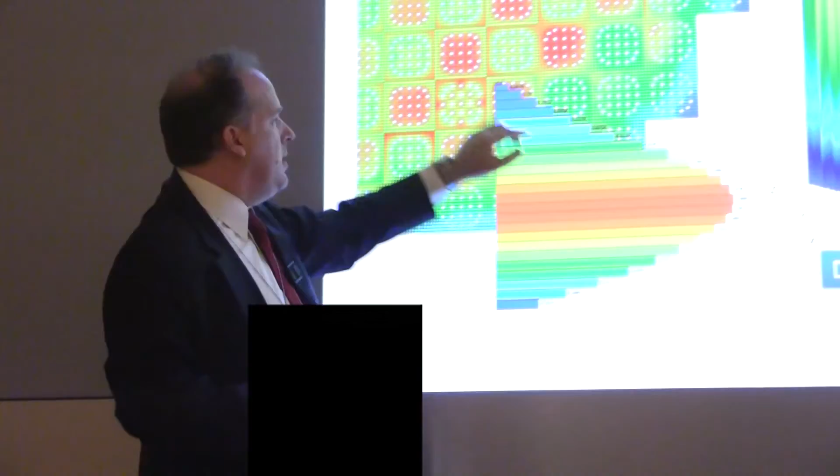Could you talk a little bit about the versatility of this with regards to other reactor types, particularly like MSRs? You've got to worry about a different type of coolant and different geometries, but you still have neutrons, you still have heat transfer, you still have structural mechanics and all that base technology. In fact, DOE said you must select and model physical reactors, show that it's relevant to actual operating reactors, not a design that isn't operating yet. But in general, the simulation technology we're putting together, we expect it to be broadly applicable to a large class of reactors.

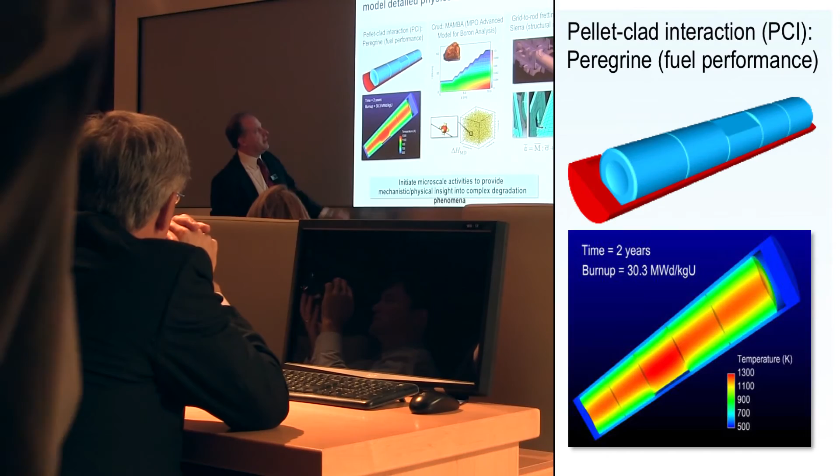This calculation here is looking at a fuel pellet that might have a chip in it, and what would happen is that you operate with a chip in a fuel pellet, what would happen to the cladding and the stress on the cladding. This actually shows what holds the fuel rod steady. If you get a gap in here, the rod can vibrate and wear a hole.

For the nuclear industry, for the most part, I think it's fair to say they're really not interested in novel concepts. They have problems today that they want some help with.

Some of the people that we were visiting with in Oak Ridge over the last few days were retirees who had actually worked on the molten salt reactor program. An issue that was repeatedly brought up was it's a very, very different kind of machine than what the nuclear industry is used to. Suddenly here were these young people who were kind of showing an interest in their technology that they obviously had a real fondness for.

There's now a whole bunch of people out on the internet that are following this, taking such an interest in their sort of pet project that they clearly loved. One of them said, 'Oh, everything I worked on got cancelled.' It's like, which they feel, that perhaps their secret had been overlooked. But I think we're hopefully resurrecting it just in time.

A filmmaker in Canada put out a request on Kickstarter, which is a way to raise funds over the internet, saying, 'I'd like to make a video. I've done everything up to this point for about $1,000. I'd like to get $20,000.' When we told those molten salt reactor retirees that 600 people had donated $40,000 on the internet to make a video about their work, I can't even tell you how excited they were.